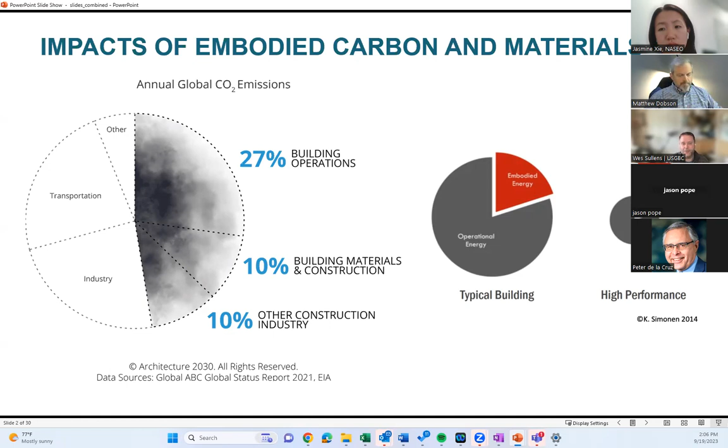Next, please. And so with that, there's a lot of jargon and terminology around embodied carbon. I wanted to do a couple things on setting the stage for some of the acronyms you might all hear us throw around. As you've probably seen, there are these life cycle assessment stages that have the product, construction, use and maintenance, and end of life phases. You'll see these often referred to as the A through C phases, or even a D phase sometimes for other things that aren't captured here. But they try to measure the life cycle impact of a thing, a product, a material, a building, whatever it might be, using terms like cradle to gate, cradle to grave, et cetera.

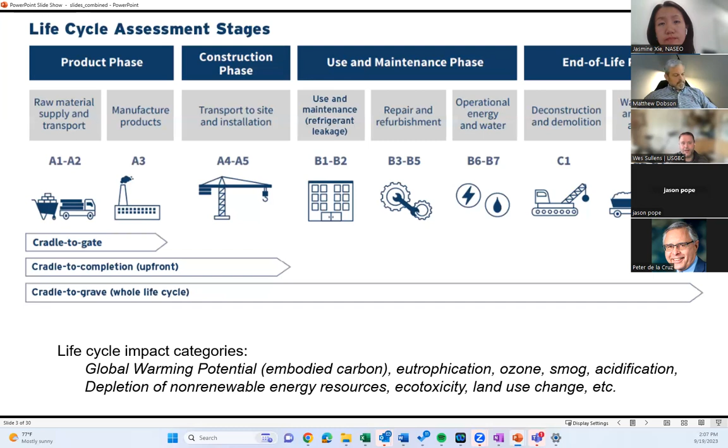But what's important is that for LCA, that's not just embodied carbon, it's not just GWP. We're also looking at other impacts like the ones at the bottom there — eutrophication, ozone, smog, et cetera. So the life cycle is really a way to look at anything you're doing, from a building to a product to anything else, from a holistic perspective. Next, please.

And this is a graphic I want to just share. Next week is our big conference, Greenbuild, and we're going to have lots and lots of good content on embodied carbon, one of which will be a report we're releasing with RMI on how to drive down embodied carbon in buildings. And this is one of the infographics that's in our report.

But just wanted to paint the picture: oftentimes you'll hear about whole building LCA or whole life carbon assessment, and they get confused with things like upfront material carbon accounting. So we wanted to share the differences here. Whole building LCA means you take all of those impact categories, GHGs as well as eutrophication and some of the other things, and you look at the whole building's life cycle from A to C, from start to finish. A whole life carbon assessment does that same thing, but just for the carbon parts. They don't look at the other impact categories.

And then an upfront carbon assessment, this is more like what you might see in the EC3 tool, which I'll talk more about later, which looks at those upfront material emissions just from embodied carbon, the GWP only. So just want to set the stage a little bit on some of these terminologies. Next, please.

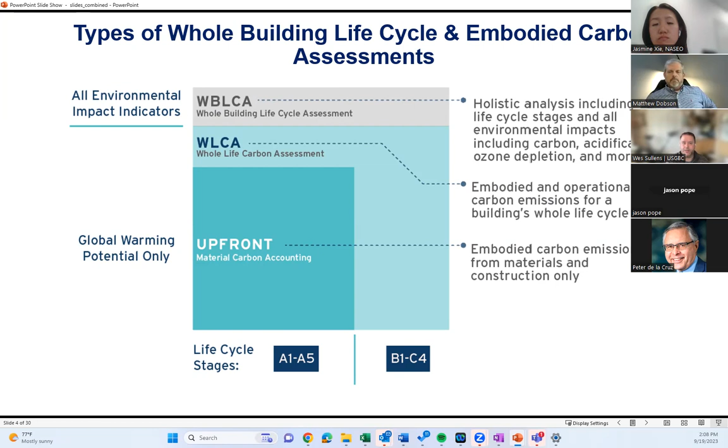And then an EPD is really a nutrition label for a product. Of course, everyone probably knows what these are now, but they do report all those life cycle impacts beyond just carbon. And fundamentally, EPDs are created by product category rules. That's something that typically industry groups will create for their product category, and it sets the rules for how you do the LCA for that type of product.

And the EPD is really a disclosure. It doesn't mean you're necessarily a better product than something else. It just means you're disclosing the impacts in a public way that's consistent from one product to another. Next, please.

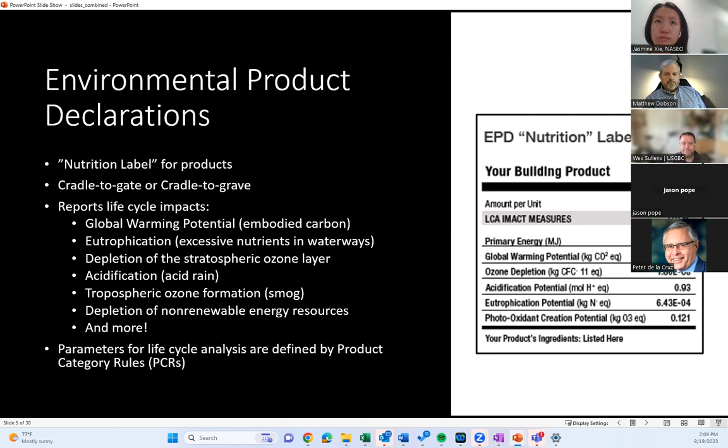And so where we are today, and you kind of see on this chart, is we are at the bottom of this rapid advancement of where we need to be. Because, you know, we've spent the last 40, 50 years working a lot on operational energy efficiency, and that's been great. And we've had a lot of time to perfect that. And now zero energy buildings or even net positive buildings are within our reach. We can build them. There's case studies. You've seen them.

We need to do that same type of innovation and get to where we need to be with carbon storing materials, but much, much faster. We don't have 40 years. We've got maybe 10 or 20, right? So if you click one more time, there's a call to action here. And again, this is from our report with RMI, but we must accelerate our position on this curve to meet thresholds. The time to act is now. And a lot of folks are acting now.

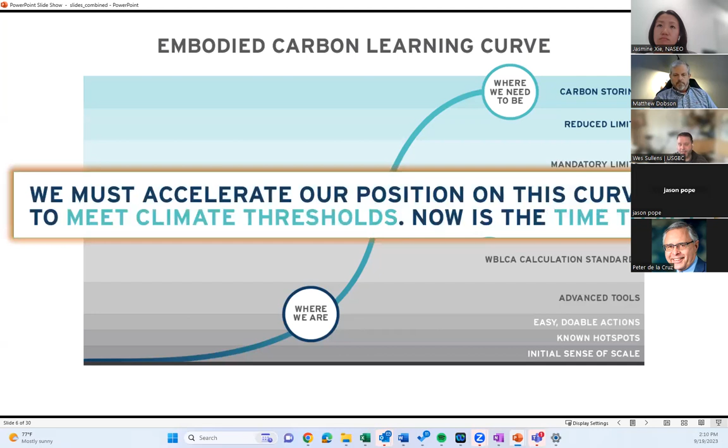Next slide, please. We are making progress. There's a lot of policies that have been put in place. Some have been around for a while. Like on the left here is the Buy Clean California Act, and some of the UK standards and EU framework. Those have been around since around 2017. But you see, as the timeline progresses to current day, lots and lots of policies are popping up.

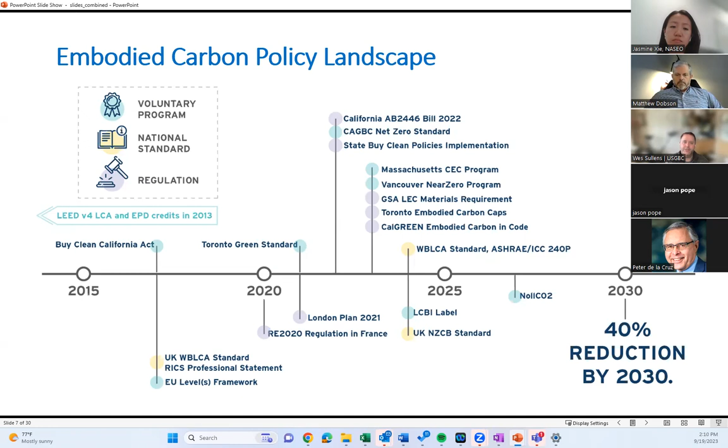The most recent being the California Green Building Code, which now has embodied carbon as a mandatory element for larger buildings in the building code starting next year. So that's a big change. You see a lot of other policies. We have the federal Buy Clean standard, which is looking at similar things like California for product-specific limits of embodied carbon. And we're seeing more and more of these policies every day. Next, please. We really need to speed those up.

And now when we look at LEED, LEED's been around since the late 90s, right? And the rating system is continuously evolving. In 2013, 10 years ago, we developed LEED version 4, and we introduced some of these concepts of life cycle analysis and transparency.

Up until that time, our attributes for products and materials had been around kind of single attributes like recycled content or sustainable wood or whatever that might be. But we wanted to really focus on holistic life cycle analysis of products. So EPDs, whole building LCA, ingredient disclosure, those were all added to the rating system.

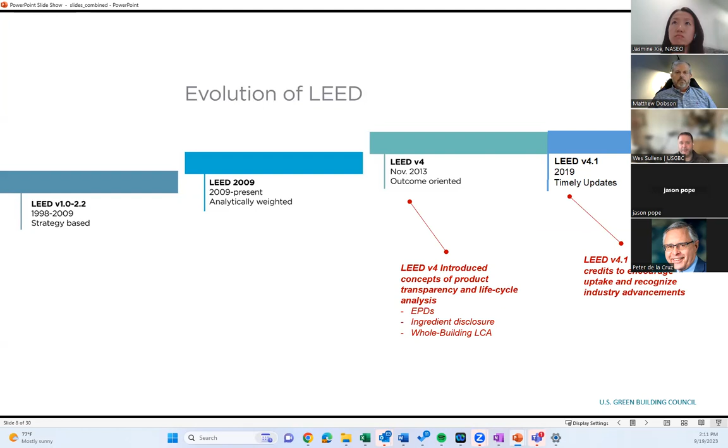And they didn't get a lot of uptake at first because these were very new concepts. But in the last 5 years, and with LEED version 4.1, which is an update, we've seen a lot more interest and uptake of these credits. And on the next slide, you'll see sort of a trajectory of some of those trends. Oh, I guess that's coming later.

But this one, let me share: the strategies we do for embodied carbon in LEED are threefold. There's sort of things that the design team can do, which is first you kind of reuse a building and then use your LCA to inform your design and drive down carbon. And you see kind of the strategies in blue there. There's reuse, dematerialization, et cetera.

Then there's things that product manufacturers can do, and you'll hear about some more of that today on this call. They can do things to optimize their products. They can switch to renewables. They can use recycled content. They can put clean energy in their production. Lots and lots of things they can do as a manufacturer to drive down carbon of their products.

And then there's a construction team. Once you've got this great design and you've spec'd all these great products, the construction team is the one who puts that all into practice. And they can do things like reduce waste also, which has embodied carbon implications of things not going to landfill or being incinerated, et cetera.

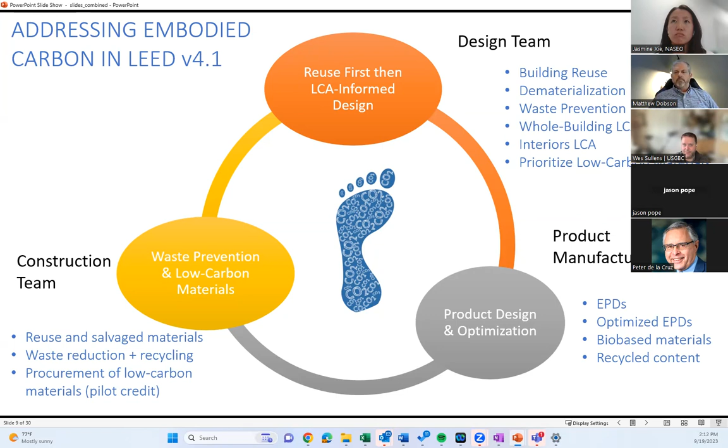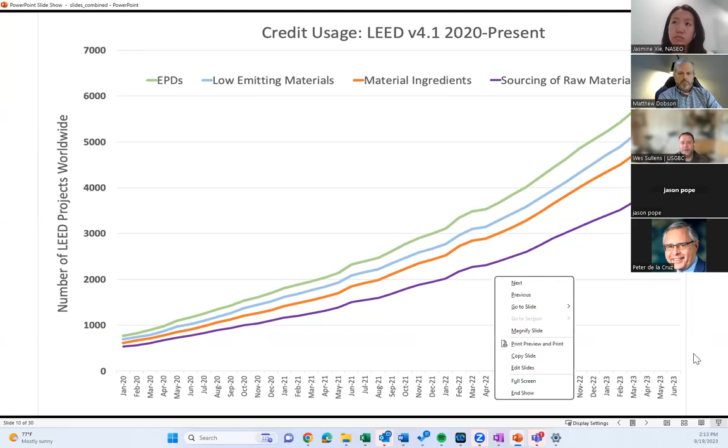And if you click one more time, there's another stat that comes up. We're at a point where EPDs are now the most popular credit in the materials and resources credit category. And about 80% of all certified projects get at least one EPD credit point. And that point rewards teams for picking 20 products that have EPDs. And many projects are getting 40, 50, 60 products and getting extra credit for that.

And we're also seeing about 25% of all new projects are attempting whole building LCA. That's up from a few years ago, when there was almost zero that actually got that credit. And now we're seeing a great increase in projects pursuing it. So lots and lots of important things happening in embodied carbon, and we're seeing that reflected in the rating system. Next, please.

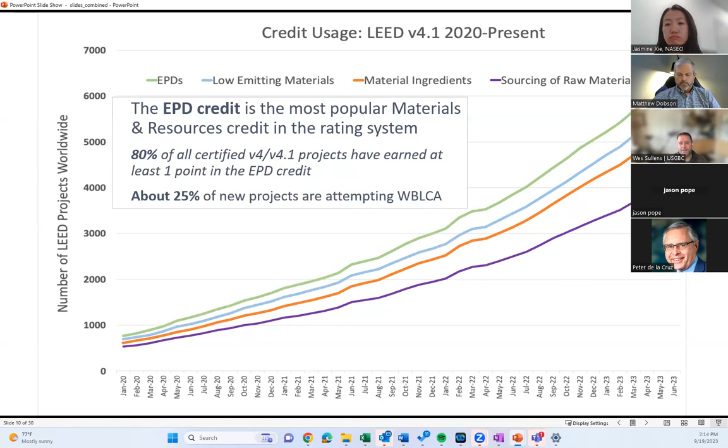One of the things we're piloting and testing in LEED is this procurement of low carbon construction materials. The idea here is that there's a lot of EPDs in the marketplace now for certain product categories, and we got lots of excitement around, can we kind of put together all the EPDs we have and create a carbon score based on those materials and reduce by some amount.

And there's a tool out there called the Embodied Carbon in Construction Calculator, EC3. That's a free resource. It's been out there for a couple of years now, and there's a pilot credit in LEED that allows you to use that or other tools to develop kind of a whole project or as much of a project as you can. You develop a baseline, and these are all based on EPDs. You develop a baseline for what the average is for those types of products.

Then you calculate a verified reduction by what products you choose that are better than average. And then you calculate that difference and get points as you see on the screen here. And that's been a pretty popular credit, with lots of interest in use of this type of analysis tool. And also, I think it's helpful in things like the Buy Clean policies as well, because it's a place to take all that EPD data and make it actionable. Next slide.

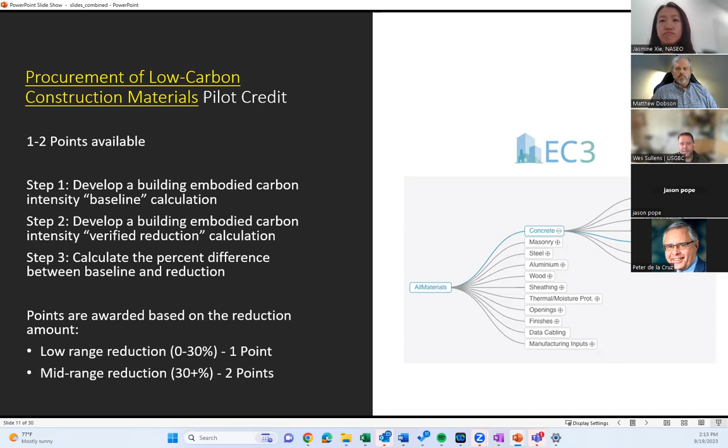So just to kind of sum up here, it's great to focus on those kind of product swaps, but something that we've been really trying to advocate here at LEED and USGBC is you need to look at all of the combinations to drive deep reductions. And oftentimes you'll see policy things that just drive on one of these attributes, like maybe they look at recycled content or they look at low GWP products.

But really, if we can do all these things, reuse first and then have a project that really fits its size and is as compact or is maximizing its potential for the building, you optimize the structure, you don't over-engineer it for things that aren't necessary. And then you choose low carbon products once you have that design spec. That's how you get to truly optimize buildings and see large reductions.

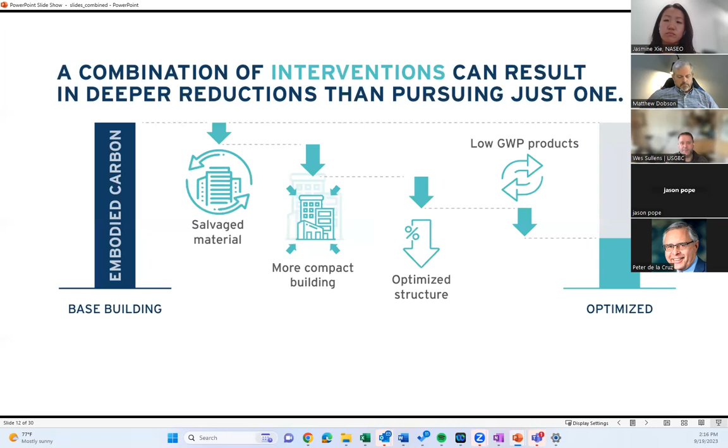Next, please. I think it's my last slide, which is just a little plug for LEED. We are currently working on LEED version 5. There will actually be a version for existing buildings that comes out next week at Greenbuild. But the new construction rating system, we're finishing up this year to bring out to the public next year. And there's going to be a lot on embodied carbon.

We're going to have hopefully more points for it. And we're going to be focusing on all the things you just heard, from whole building LCA, to product-specific material categories, and we won't be forgetting the other attributes like sustainable sourcing and circularity of products and materials as well. But look for that in the coming months.

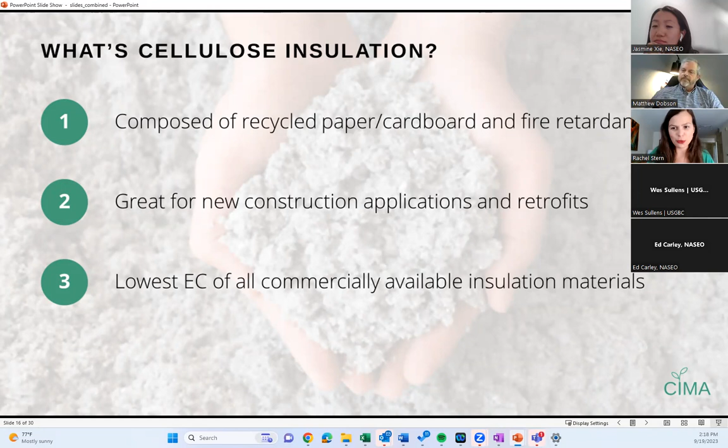We have a significant presence among the Weatherization Assistance Program because of the ease of install and the fact that it has the lowest embodied carbon, and also just from a cost standpoint, it's pretty much on par with fiberglass batts. And just a fun fact for you, Thomas Jefferson used a form of cellulose insulation to insulate his home at Monticello a few centuries ago. And next slide, please.

So here's the hard part for everyone in our industry. How many homeowners care about their insulation? So we care about aesthetic elements like countertops, fixtures, what are the paint colors? But only when you get your first energy bill, and remember the time you wore a sweater in one room and then a t-shirt in another room on the same day, do we pay greater attention to the energy efficiency of our homes. And we certainly pay less attention to the embodied carbon of the insulation used inside these homes.

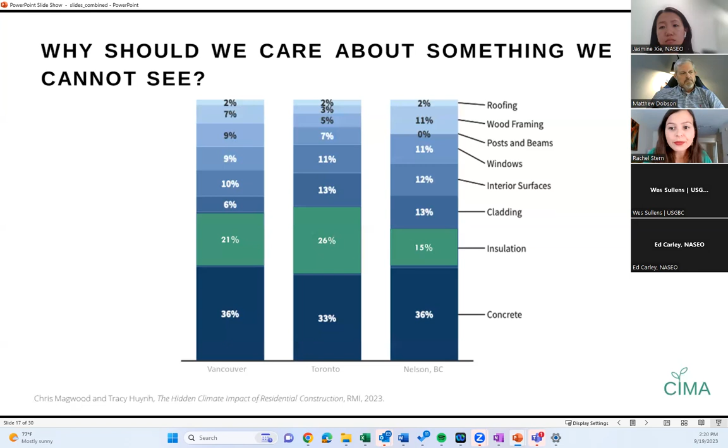So the good news, though, is that more prospective homeowners are paying greater consideration to the health of their home and their health inside their homes. So this often includes factors like air quality, but it also includes comfort. And I don't know about you all, but I live in an uninsulated apartment building with leaky windows and loud neighbors. And having some of these factors addressed would make things far more comfortable. So cellulose addresses both the thermal comfort as well as acoustical needs of homes of all types.

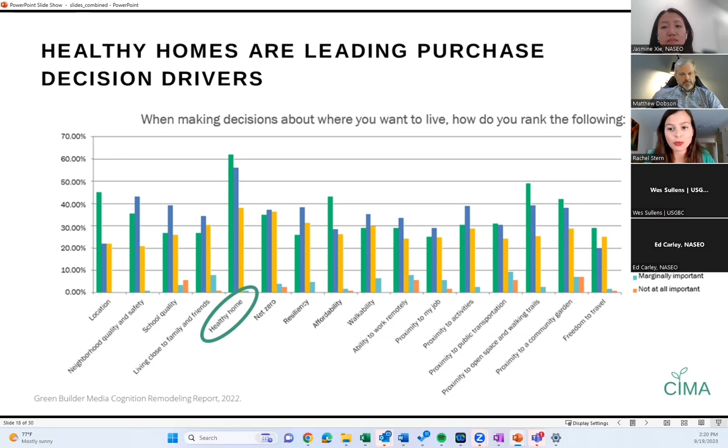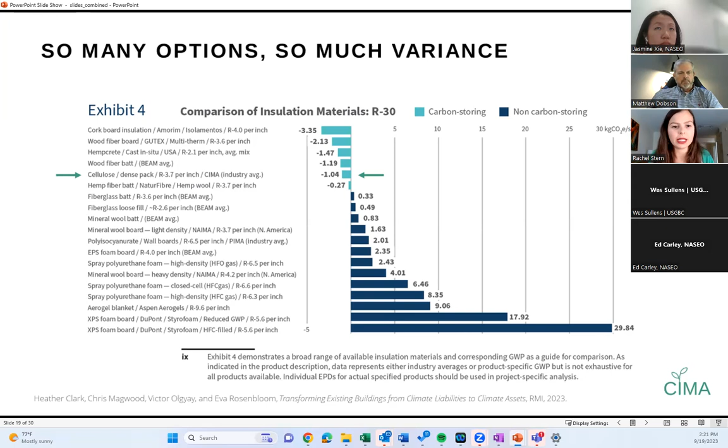Builders, homeowners, and designers have numerous insulation materials to choose from when considering new construction or renovation. The range of embodied carbon impacts is wider for insulation materials than for any other category of building materials. Bio-based insulation materials, shown in lighter blue at the top of the chart, provide net carbon storage in the building, offering a win-win of reduced operational and embodied carbon emissions. You'll see the term dense pack next to the row listing cellulose. For those unaware, dense pack is a method of installing cellulose using netting to hold the insulation in place, and you'll generally see that in new construction.

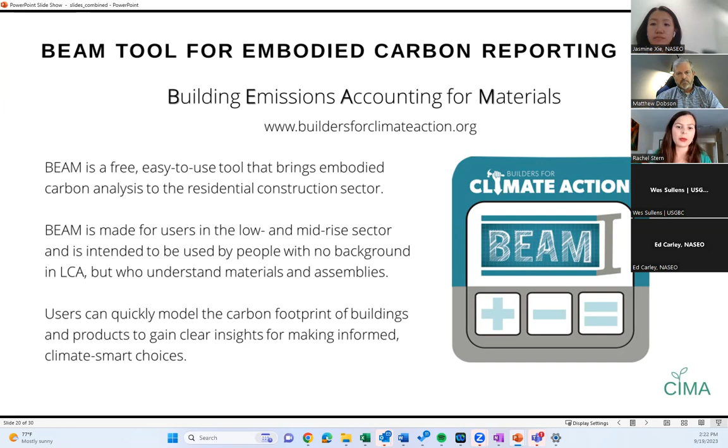Wes talked about the EC3 tool for measuring embodied carbon. I want to highlight the BEAM tool, developed by Builders for Climate Action. This program is also free to everyone, and it's primarily used to assess embodied carbon in residential structures.

The biggest differentiator between EC3 and BEAM is that BEAM is currently the only tool on the market using a consistent approach to calculating the impacts of carbon storage in building materials. The folks at Builders for Climate Action—shout out to Chris Magwood, who some of you may know, also at RMI—worked to develop a carbon storage methodology that's science-based, transparent, and brings in other verified inputs. It's also easier to identify materials with high climate impact and compare them with alternative greener options.

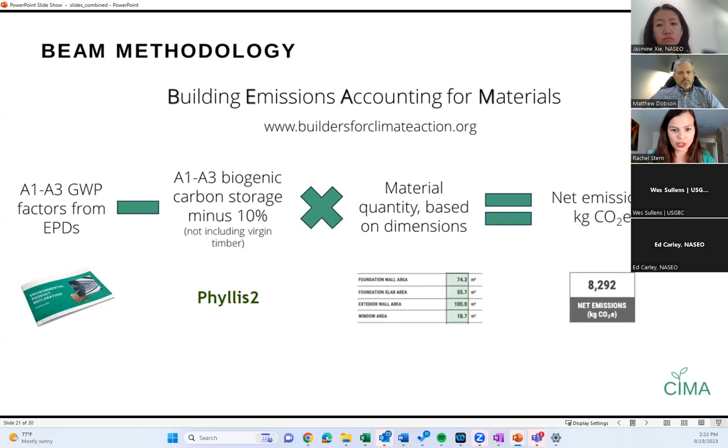Recognizing that insulation products have very different climate impacts, from high emissions down to net carbon storing, it's helpful to understand what that means for emissions at a construction project. Let's take this DOE model home as an example. You can see in the diagram the square footage of the insulation areas and the dimensions of the home.

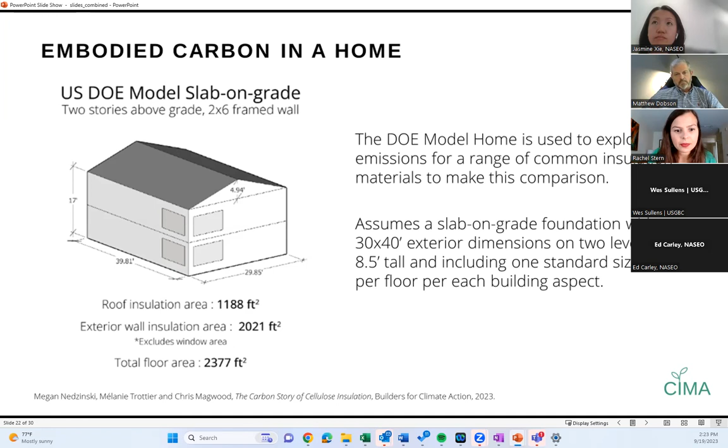Cellulose stands out as having significantly lower, actually negative, embodied carbon emissions at installation compared to other insulation types. We offer 124% less emissions than the next closest option, fiberglass batts, and 719% lower than closed cell foam with an HFC blowing agent.

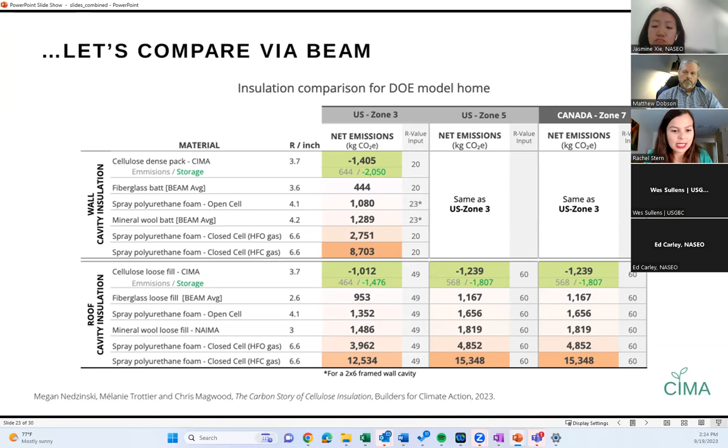This graph presents a closer look at embodied carbon when comparing cellulose with the other materials in this home for Climate Zone 5. Totaling the emissions from both wall and roof insulation for Climate Zone 5, cellulose offers a net storage of 2,644 kilograms of carbon dioxide equivalent, while the closest competitor, fiberglass, emits 1,611 kilograms of carbon dioxide equivalent. And you see at the end there, closed cell foam with HFC blowing agents has a significantly higher kilogram of carbon dioxide equivalent.

At the level of a single home, these differences in embodied carbon are substantial, but extrapolated to typical new home construction across the US and Canada, it becomes increasingly clear that the use of carbon storing insulation materials can alter the emissions profile of new homes and climate impacts overall.

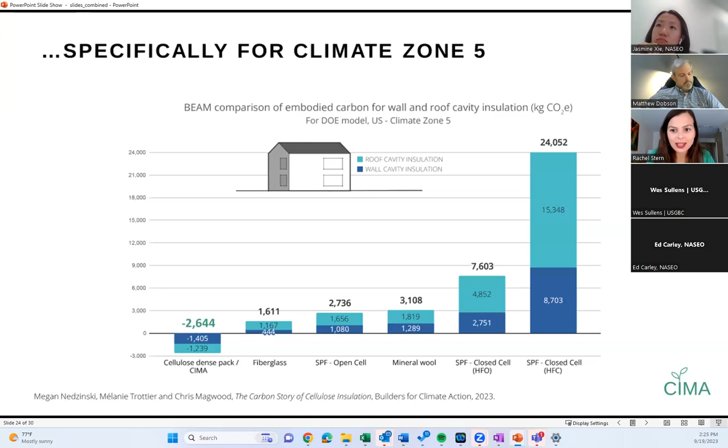As for our EPD, CIMA first developed its EPD in 2018 and we're approaching renewal next year. However, we're not taking steps on that until the product category rules for building envelope thermal insulation are updated. Our industry collectively met and hired a facilitator to collect comments and organize a committee with representatives from all segments within the insulation industry to review the comments. Our biggest advocacy point is for carbon storage, which is also consistent with ISO standards. This is a lengthy process—lots of comments and many different folks advocating for or against changes to the product category rules.

So while our EPD does expire at the end of next year, we're not jumping the gun to start collecting data from our members until we have a greater sense of when that PCR will be finalized. Right now we're in the early stages of getting an LCA practitioner on board. That practitioner will collect data from each of our members, and then we'll find a program operator to make the EPD. Once that's done, we'll share it with the building community so people have the most accurate information about our product and how cellulose plays a role in reducing the embodied carbon of buildings.

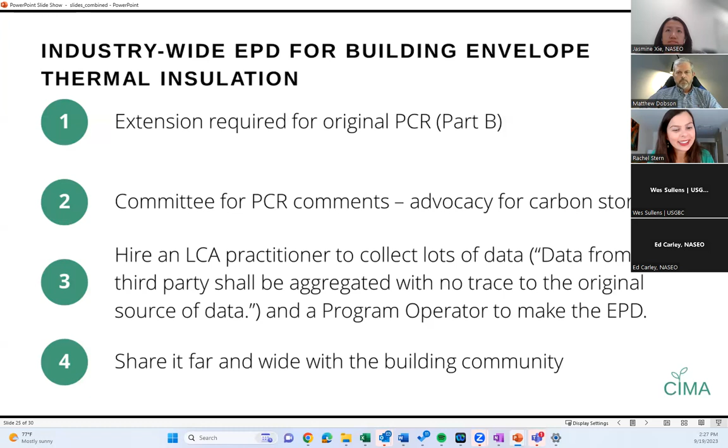That's all I have, and if there are any questions, I'm happy to address them during the Q&A. Thank you.

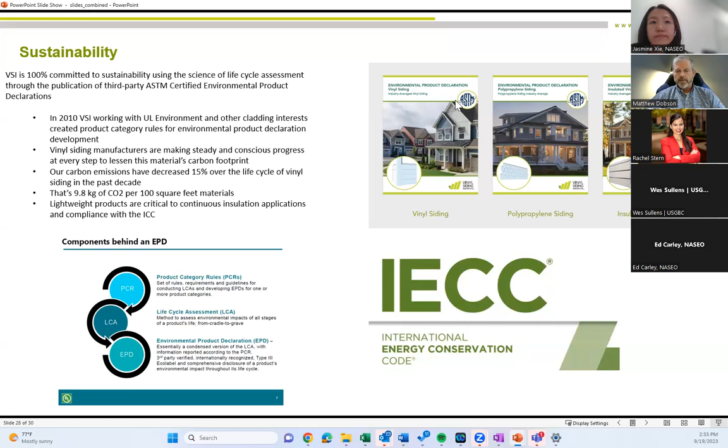Next slide, please, Jasmine. All right, let's get back to carbon footprint. Vinyl siding products in general have a very small carbon footprint, specifically when you compare it to other cladding products. Keep in mind,

everything we do has some type of impact and creates some type of carbon footprint, regardless of what it is. We're all here creating carbon footprint, really just sitting here using the energy we're using right now in front of our computers. There are no building materials or anything in general that do not impact the environment. So everything has a carbon footprint.

Certainly wood as a material is also renewable and is one of the great solutions to our carbon quandary. But it still has a carbon footprint when used as a building material. But its footprint is reduced because it is renewable.

Our products are in a good position to help not only limit carbon footprint, but also help take next great steps that are going on with the International Energy Conservation Code with outboard insulation.

100 square feet of our material has about 9.8 kilograms of carbon dioxide baked into that product. Baked meaning when the LCA goes through its process, you're looking at all the steps along the way: the extraction of the product, if we're using more recycled material, the energy that goes into it, the other materials that go into it, and their carbon footprint.